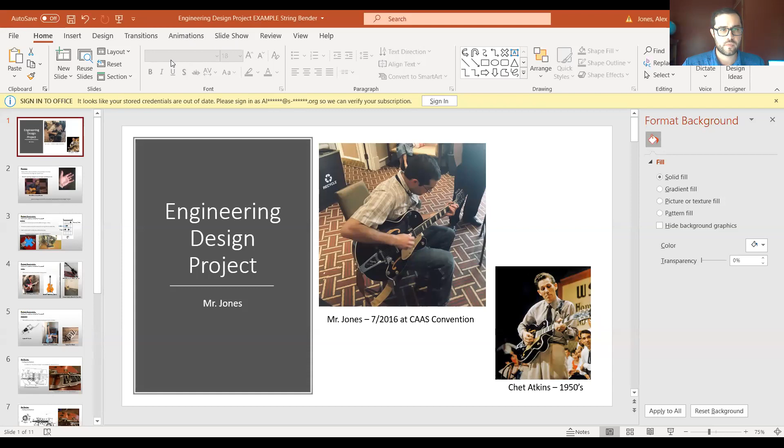I'm going to go ahead and share my screen here and start a presentation. I'm going to kind of do it like a presentation to me, but also talk a little bit about what's important, what you should hit on, and give you some information about how you would go about doing this.

I just want to describe to you my design project, and I've prepared this presentation for you. So this is me, a picture of me in 2016 at the Chet Atkins Appreciation Society, and I am playing a historic guitar. This was Chet Atkins's guitar. Most of you don't know who Chet Atkins is, but he's a guitarist back in the 1950s. He has passed on, but he is basically my hero, somebody who I aspire to be like, somebody who I aspire to play like, just a wonderful person who made a lot of beautiful music.

So here I am, I got the opportunity to meet with a guy, his name is Tom Doyle, and he owned this guitar. It was a really famous guitar that Chet Atkins played. In the 1950s, they were developing this guitar, trying to make an instrument that would behave a lot better than acoustic type instruments on stage, because acoustic instruments can feed back and do things that are not wanted when you're on stage. So he was trying to modify the guitar and make it more stage friendly. This was one of the early prototypes of what is called the 6120 model of a Gretsch.

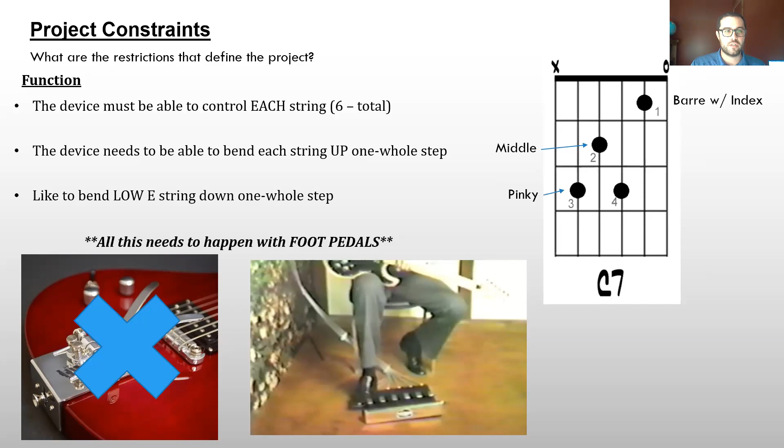What actual guitars does it need to attach to? That's another category I broke my constraints into. And then how does it actually attach to the guitar? I'm constraining this whole project to say it's got to fit on these devices. If it doesn't fit on these devices, it's a failed project - it doesn't work. We need to go back to the drawing board and figure out how it's going to.

Then talk about your design. You've talked about the problem - this is the issue that's making everybody's life complicated. Talk about what you need it to do - I got this idea, this is what it needs to be. Now we talk about your design: how are you actually going to solve the problem and stay within those restrictions inside your constraints?

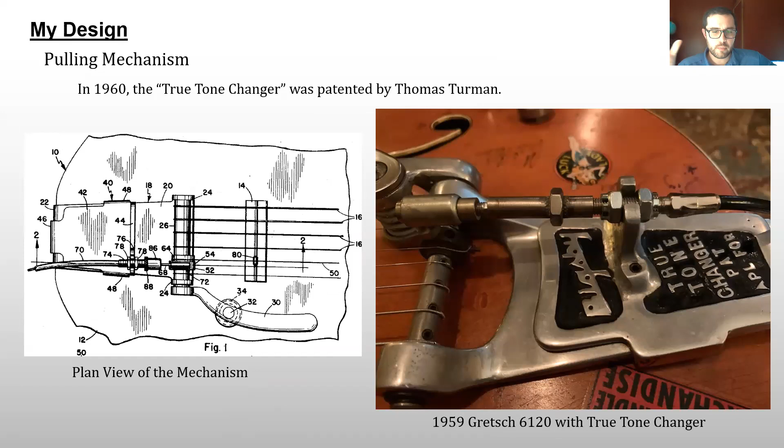So here, I guess I categorized this, but I think I forgot to update one thing - the pulling mechanism, the cable attachment, and the foot pedals. So there's basically two different designs: the pulling mechanism and the foot pedals. Looking at how those work - again, you don't have to know every single detail of how this is going to work, but you need to have a general idea of what you want, and you've got to have a good starting point to go after.

Now, am I going to hit roadblocks? Yeah, definitely. Am I going to have to tweak things a little bit? Absolutely. Hopefully I don't have to tweak things entirely - that's the idea. You put in the legwork to make it so that you make small tweaks rather than huge functional tweaks that require you to go back and redesign everything.

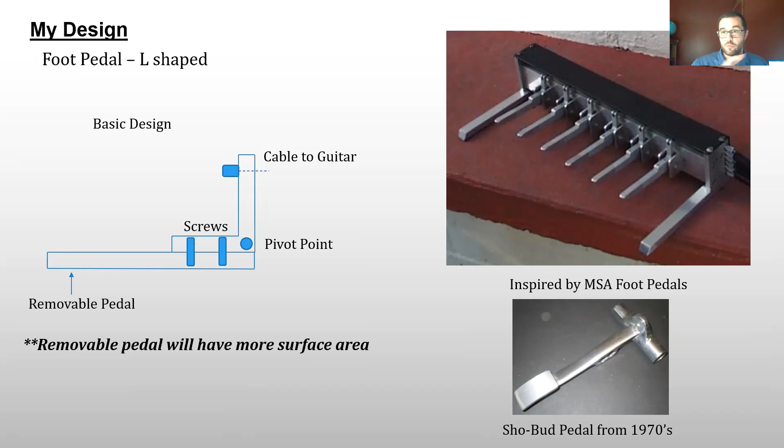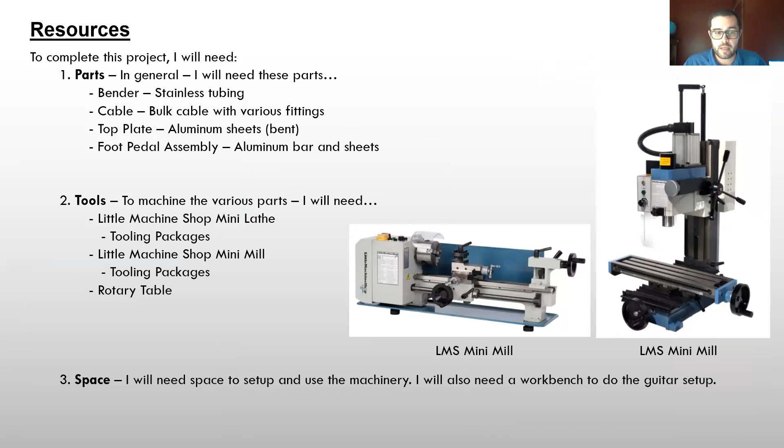Then talk a little bit about how you're going to model this. Then talk about the resources that you're going to need - what are the actual parts and pieces that are going to go into it? What am I going to need to order? And then how much is it going to cost?

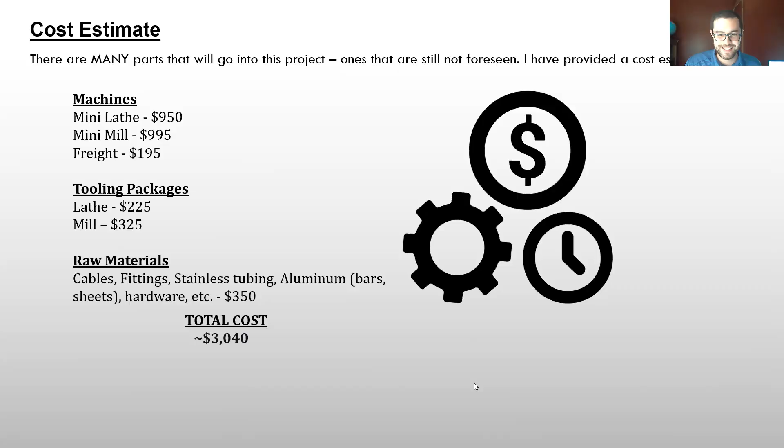Great, don't say anything, I haven't stopped recording. That was my wife, by the way.